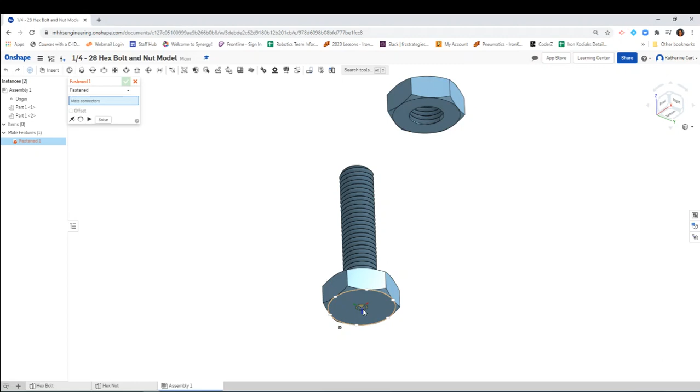Click once. Now I'm going to rotate it down, and I want to make sure again that the mate connector is mimicking and going to be parallel to the top of the bolt head. Yep, that looks good. Oh, not that one, but this right here, that looks great. I'm going to go ahead and click to make that stay, and it should constrain them together. Confirm, because that looks good. I'm going to close this window, and check, and yes, that looks great.

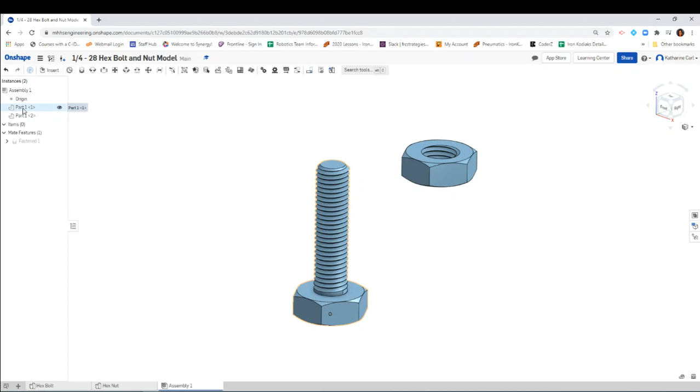I'm also going to just add an extra little way to fasten something down to make sure it's not going to be moving, since this is our base object. I'm going to go over here, and you can either right click on this part, because when I'm even clicking on it, you notice it's highlighting this hex bolt in yellow. So you could right click the part over here, or I can right click the object right here, and I can click on fix.

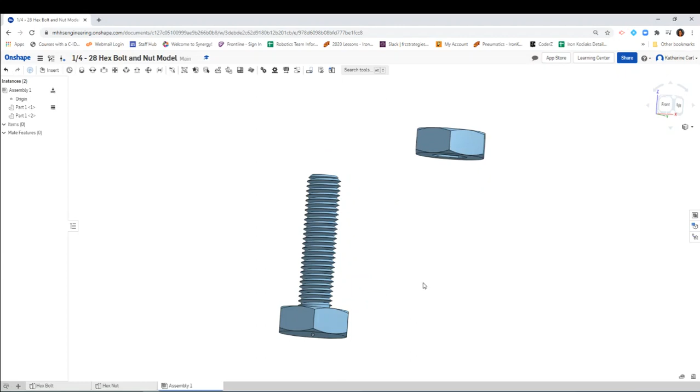That just adds a little bit more of a constraint that is on there. It looks like it's having a little bit of an error, so I can delete that and we will see. And if you notice, it has been fixed. So I placed it on the origin first to make sure it was nice and centered on our origin, and then I went ahead and fixed it. Then I went back and deleted that fasten mate just so there wouldn't be any conflicts.

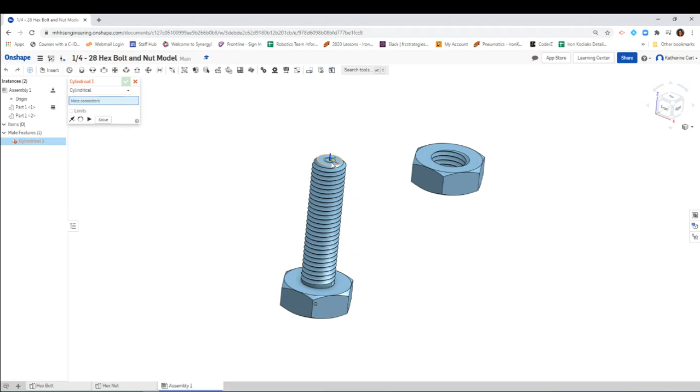So the next step is I'm going to go ahead and place this nut on the bolt, and we're going to first use this cylindrical mate. I'm going to click on here. For the cylindrical mate, I'm going to select this top portion of the bolt, and make sure again that mate connector is in the center. And if I think about it, I want this to line up with this top part, but in the center.

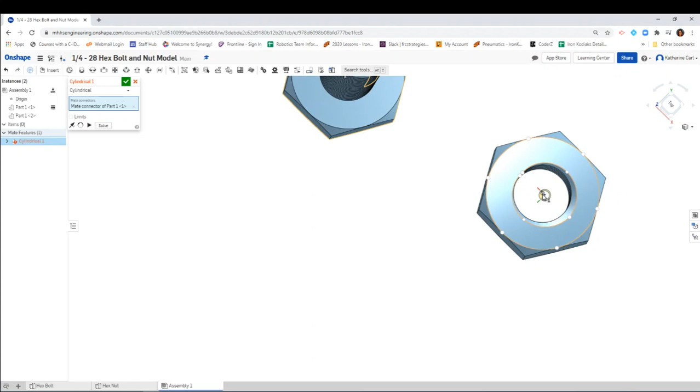So you guys notice it's a little bit tricky to see, right? There you go, that's in the center. I'm going to click to make that stay, and go ahead and click on the isometric view. That looks good, kind of look at it straight on. I can even click on the top view. Click the green check, and now if I turn it, you'll notice, and if I try to move the nut, it spins, and then it also moves up and down.

And if you notice, yeah, it's going to go into the hex bolt head, and that's just because this program doesn't necessarily tell you when things are clashing, unlike other 3D modeling softwares.

Okay, so now our next point is we want this nut to actually screw or spin along the threads that we have. So we're going to use this screw relation. One key thing, if you hover your mouse over it, you'll notice and read that you need to have a cylindrical mate. That's a big reason why we created the cylindrical mate first. You cannot use this tool if you do not have the cylindrical mate.

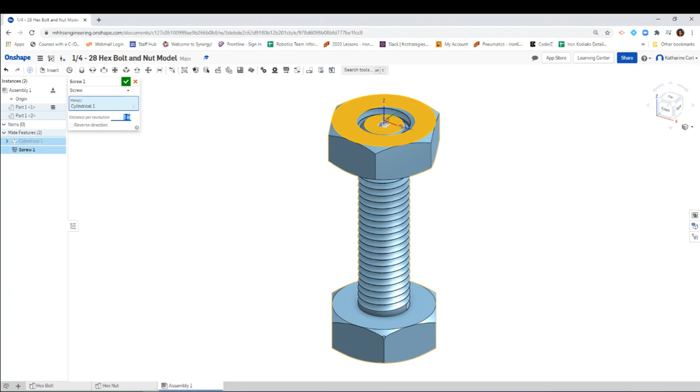So I'm going to go ahead and click on the tool. I'm going to click on the cylindrical mate over here, and then I need to enter the revolutions, the distance per revolution, which means when it rotates one time around, how far down does it move in a linear direction. And if you think about it, that's actually the pitch of the threads. So I'm going to type in 1 divided by 28 because that was our pitch dimension from before.

And I'm going to click on the green check and let's try to rotate it. Look at that, there we go. When I spin it, it's going down. Awesome, and there it goes all the way down. And then if I spin the other way, it brings it back up. I'm just clicking and holding on the bolt, rotating my mouse in one direction and then the other. And there is our hex bolt and nut assembly.